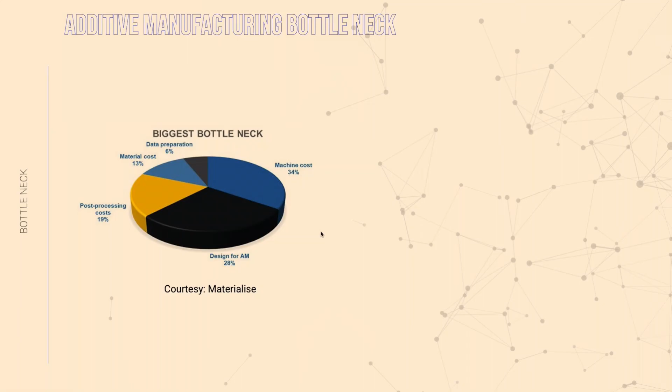So first, I want to start with the bottleneck of additive manufacturing industries. So these are some charts that I found online from Materialise, saying what is the main concern with additive manufacturing. Maybe many of you have seen it on LinkedIn. And we can clearly see that design for additive manufacturing and data preparation are kind of as important as the machine cost.

There was some other website showing what are the 10 biggest challenges of additive manufacturing. And that's where we saw that, okay, of course there are concerns with the slow production rate from the machine side, material development, manual post-processing. But then there is also a lot of things about design. We need to get the design right, get design ready for the additive manufacturing processes.

We also need to educate the workforce, also engineers and technicians who are familiar with traditional manufacturing processes. We need to bring the education on the additive side. Same with developing a business case. And it looks pretty obvious from our perspective that additive is always a good case. But it's not. We can't do everything. It's not that cheap either. So we need to find the right business cases. And there are many other things.

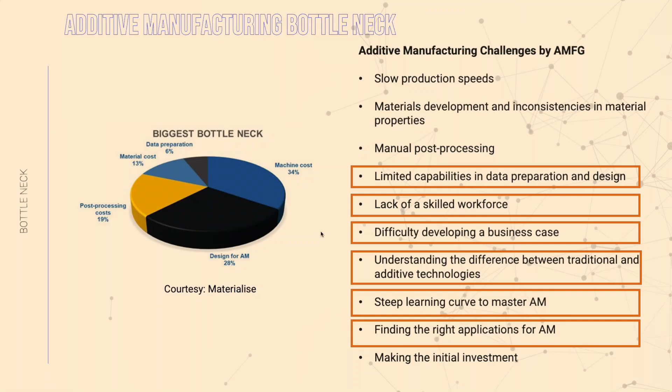So we at CDS are focusing on 6 of those things. It's a big task. But we want to make sure that all these challenges are reflected well in our software suite, and that's what we are bringing to the market. The biggest industrial challenges I can summarize in 3 questions that companies may be asking themselves. How can additive manufacturing benefit my business? Identifying the opportunities. And what do we mean by opportunities? Cost saving, lead time saving, carbon footprint reduction, weight optimization, etc.

Then, once you already have a large innovation department on additive manufacturing in large organizations, the question is also how can I store the know-how from the experts and redistribute it to the other people around the organization. That's also a challenge that we believe is true, and we have seen it in the automotive and aerospace industries that we work with.

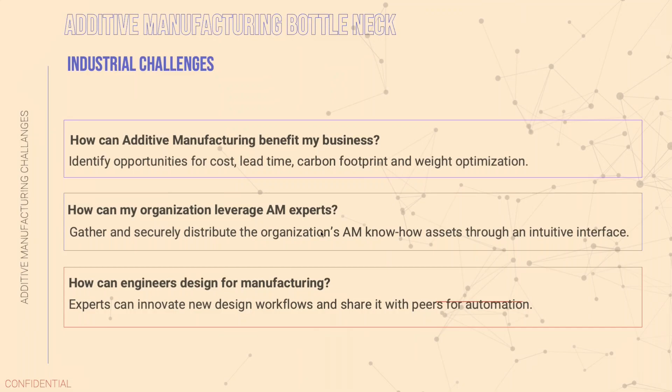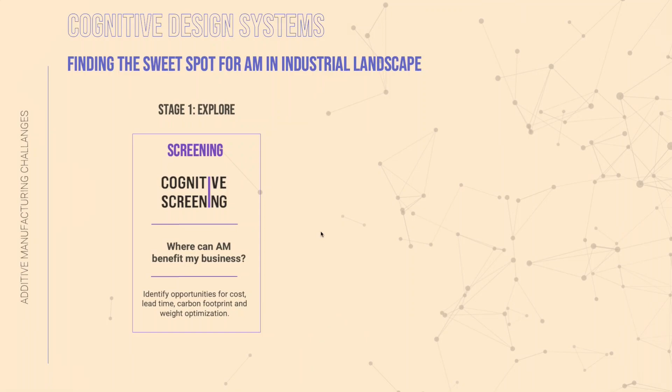And the third one is how to think AM from the beginning while conceiving a product. That's where we need innovative workflows where we can actually convert those opportunities into something more tangible and make something happen out of it. So in order to do that, we started by creating a software which answers the question, where can AM benefit my business? By identifying the opportunity for cost, lead time, carbon footprint.

Once we have identified those opportunities, not all the parts that we see in the industry are already ready to be manufactured in additive. They sometimes have to be adapted for this purpose. And I'm sure there will be some other talks later on about it. The second one is, once I have that know-how on additive, how can I propagate it? For that, we created a software called Cognitive Additive, where you can store your know-how and redistribute it to others who are maybe not as familiar as you with additive manufacturing. So that's also a key point for us.

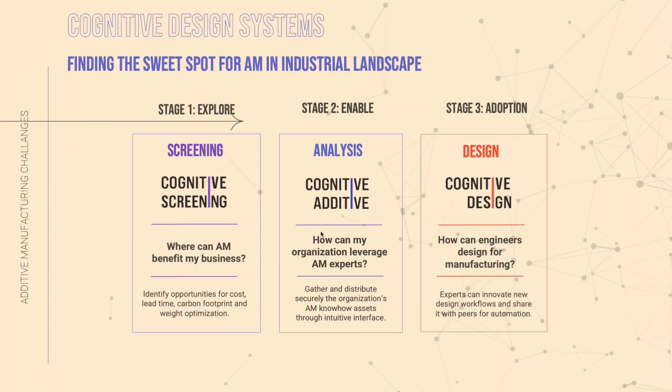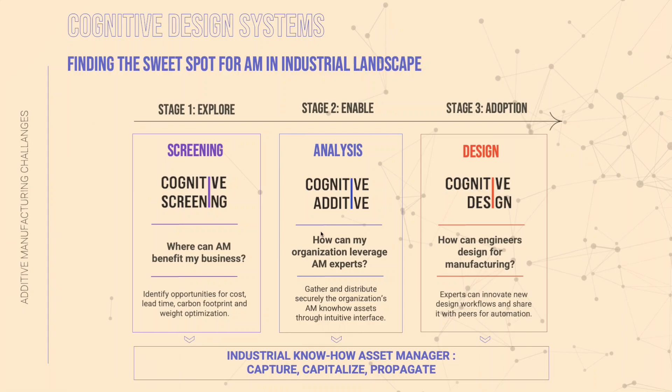And the last one, which we are presenting for the first time today, is Cognitive Design. It's our computational design software, where we can rethink how we are conceiving, but also adapt the interface to the expert level of the person in front of the software. In order to do that, we are creating an industrial know-how asset manager where we are able to collect all those insights and redistribute them through these different softwares, so we can design better, produce better, make something out of additive and find the right business cases.

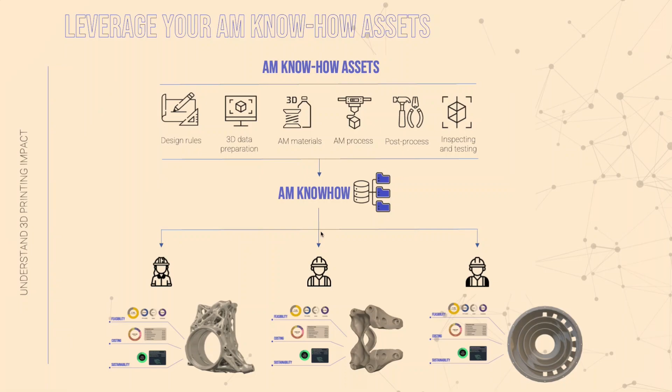So it's pretty simple. We collect those data into this database, and then we redistribute it to the various designers, AM operators, technicians, so they can understand how feasible is my part, what is the cost related to my part, what is the carbon footprint related to the manufacturing process itself.

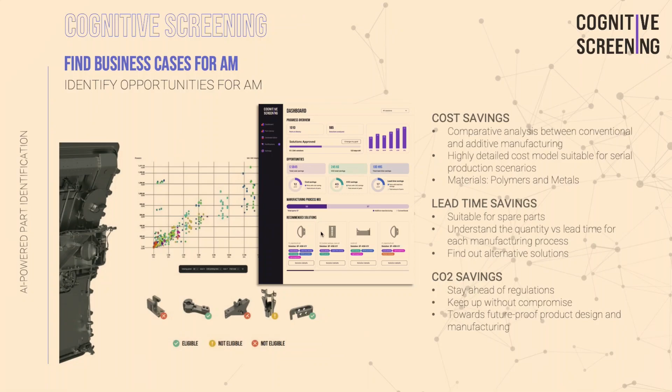That's our first step. On the screening side, as I mentioned, cost saving, lead time saving, and CO2 savings are key. We are able to take into account large assemblies or the BOM of organizations to find those opportunities. Same way with Cognitive Additive, you can very quickly, based on your database and your experts' know-how, do the feasibility check, costing check, sustainability check.

The costing model is based on, how can I say, the industry standards, and that's where we leveraged it. It's not just printing. We have pre-processing and post-processing that we need to understand, because sometimes those costs can go up to 40 to 50%.

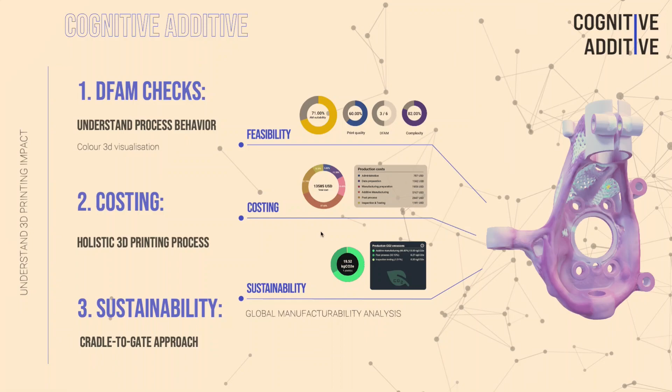Same with the sustainability. There is a lot of new trend now, and of course in Europe it's more and more important. There will be some standards coming out on the European Union side, so we need to be prepared for it. And the last is cognitive design, how to design better.

So our approach: we are coming from the manufacturing industry. My background and my colleagues' backgrounds are also from manufacturing. We were producing parts, we were failing them, and we understood where the issues are while designing the component. So we wanted to make sure that all the components coming out of my software are manufacturable. Because if it's not manufacturable, it's an art, and that's great, but it's not always our purpose. Also in large industrial organizations, that's not always the purpose.

So we created this software where we automate DFM. We will show you. We were able to create workflows using our geometry engine to automate the various time-consuming processes and steps of modifying a geometry into a manufacturable geometry. Second is how to leverage the opportunities that AM is providing us: lightweighting, part consolidation, mass customization, and adding functionalities to the part.

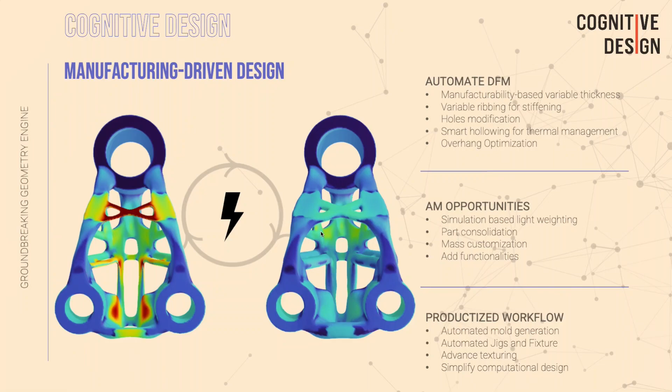And at the end, we want to make sure that these large workflows, sometimes created by experts, the expert engineers or doctors, reach the masses. As my friends at Trinckle mentioned, even the doctor in the dental studio should be able to design for their need, and that's what we are bringing. So, manufacturing-driven design. We are trying to bridge design and manufacturing by doing this.

And for that purpose, we have two categories of workflows. First is the product design cycle acceleration workflows, and the second is the productized workflow for non-specialists. The idea of product design cycle acceleration is how to make sure that all designs are manufacturable, how we can automate the tedious and repetitive tasks to accelerate them, and take informed decisions while conceiving the product.

The second one is how to adapt our UI to make sure that anybody, from somebody on the shop floor to somebody in medical design bureaus, should be able to design without having knowledge of computational design. So how can we package it this way?

So let's start with the design cycle acceleration. This is a workflow produced from all the experience we got in the automotive and aerospace industry. Of course, I have linearized it, but it's not as linear as it looks. We do the ideation in the CAD software. Sometimes we do shape or topology optimization. We do the reconstruction of topology in CAD. We do the design for manufacturing and FEA validation.

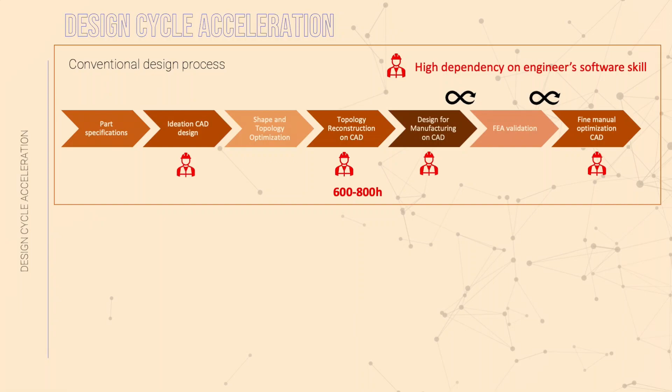Most of the time is going into design for manufacturing. That's the biggest, because it's not the same department. The information is sent to another department and brought back. There is going back and forth, and that takes a lot of time. So we wanted to bring those insights into the CAD environment. In order to do that, we created our workflow where we automate some of those time-consuming processes.

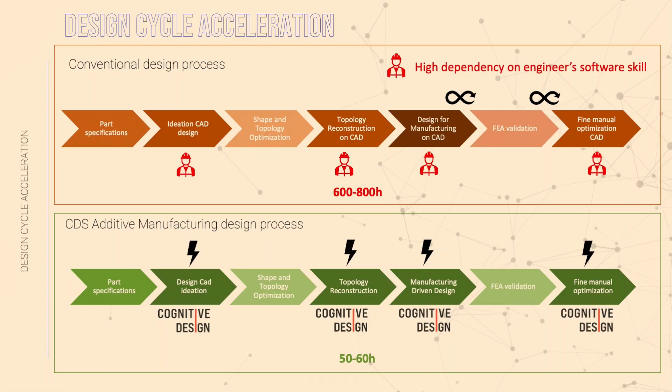So with cognitive design, we are able to easily create the ideation, the rough CAD. Once the topology optimization is done, we can also do the reconstruction automatically. I will show you that. Manufacturing-driven, same way: convert the part into a manufacturable part. And at the end, the fine manual optimization can also be done. We demonstrated with our customers that we were able to reduce the time by 90%.

These are the hard facts from the aerospace industry with Safran and others; on the Japan side, it was Mitsubishi Electric. On the automotive side, Nissan and Yamaha. Why are there so many Japanese names here? Because I used to work there for 8 years, so we continue working with them. But we also believe these workflows can apply to consumer goods, and that's what we demonstrated with Adidas and Oberalp.

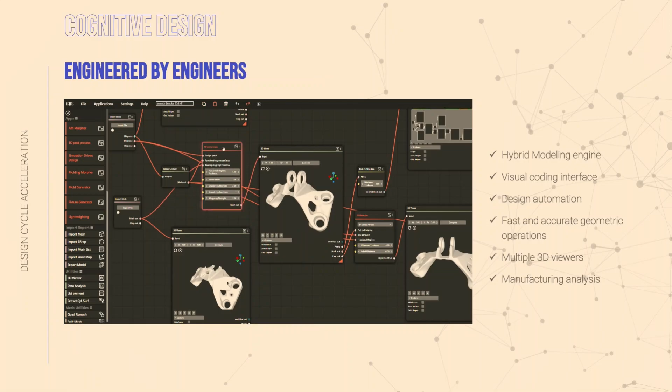Cognitive design is a software engineered by engineers for their needs. It's a hybrid modeling engine with a visual coding interface. As you can see, there are multiple viewports you can look into, so it's easy to compare with that.

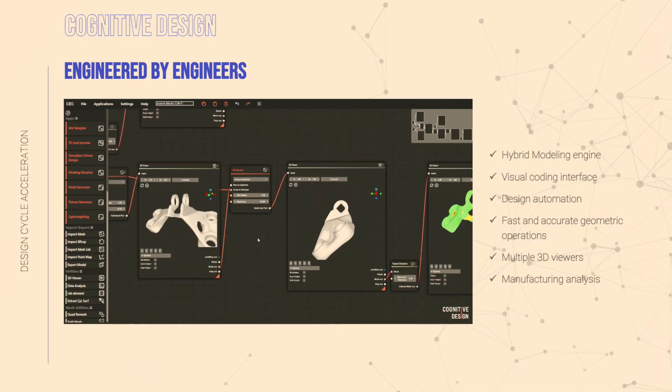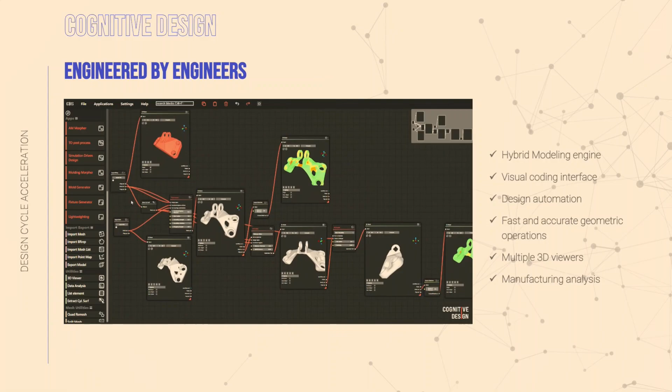Its focus is on the automation of design. We create macro blocks or workflows which focus on automating the tedious tasks of design, filleting, and Boolean operations. At the end, we also have a manufacturing analysis view where we can see, while conceiving the part, is it manufacturable? Where the wall is too thin, where there can be any issue with support structures. So we can iterate much easier in the same environment and faster.

We focused on six different workflows. These are the primary workflows, and we will continue developing new workflows afterwards. The first workflow is design for additive manufacturing. How can we automate that?

Second is simulation-driven lightweighting, or design in general. How can we modify the geometry to make it lightweight but still manufacturable? Then topology optimization reconstruction.

That is a personal choice. I was spending too much time doing that while doing topology optimization on various CAD tools that I can't name, but yeah, I wanted to automate it so we can actually spend more time on creating different variations.

Then design for molding. How can we adapt any kind of mold design, any kind of geometry, into a moldable design? So we start with a two-part mold, a simple one. We will go into detail further on how we can do much more complex molds.

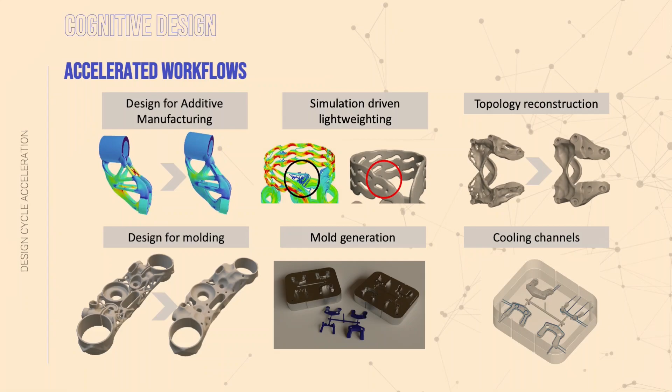We also do the mold generation itself, because once the workflow is set up, we can just input a part and bring out the molds, and we can print with cooling channels, where you can select, based on your stress and thermal stress, where the cooling channel should pass through, and it creates automatically. So the AM morpher's idea is to not spend time on CAD while changing the geometry.

Moreover, we are trying to reach complex geometries. Those complex geometries are not always easy to modify in CAD, because we need to find those structures everywhere. This is a very simple example, but imagine a heat exchanger with a lot of thin structures, and how can we modify those structures automatically so we can make it manufacturable easily.

Also add some ribs if the wall is too thin, to bring some stiffness to it. For hole modifications, first we do feature detection on the mesh of the holes, and once detected, convert them into diamond or teardrop shape, so we can print it easily and also add some over-thickness easily.

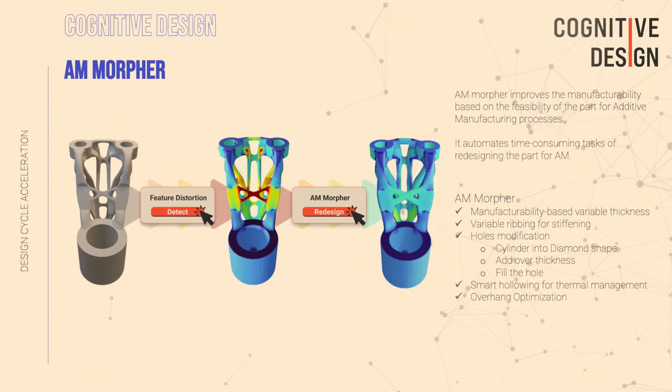Same with smart hollowing to do thermal management. If you have data from the thermal stress, how can we create the void but also create self-supporting structures internally, so we are able to print it easily without having internal supports? That part is done with just one block here. You convert it into that design pretty easily.

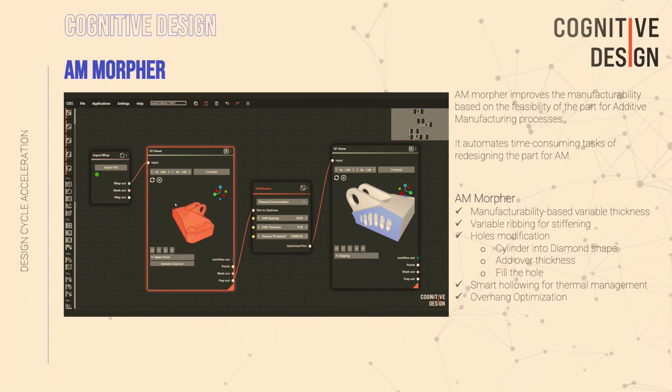Something we are working on, which will be ready for Formnext, is overhang optimization. We also modify the overhangs mathematically, so we don't have to work on it manually creating it, because the geometry coming out of topology optimization is not always easy to work on, so that's what we automate.

The second one is simulation-driven lightweighting. This example is used a lot in the aerospace industry. They wanted to keep the part almost the same, but wanted to reduce some weight. So based on stress, we changed the thickness of the geometry and reduced the weight like that, and we were able to obtain up to between 15 to 20%.

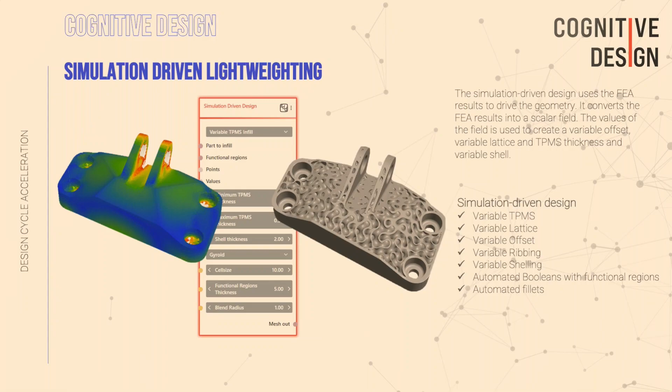It's not as large as topology optimization, but it's something which is a low-hanging fruit, I would say, that needs to be captured. Then the topology optimization post-process, it's pretty much all the Boolean operations, all the operations to reconnect the zones which are disconnected, that needs to be automated too.

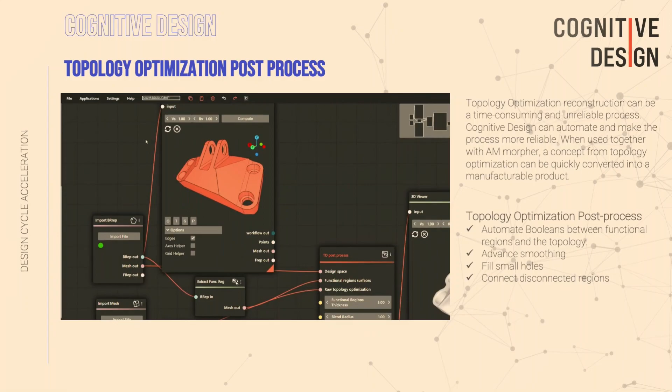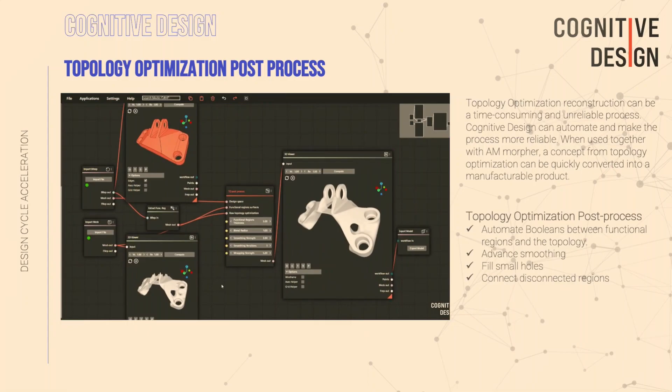So what we did is bring in the design space, extract the functional regions automatically, and put in the raw topology optimization part which comes out of other software. There is just one block which calls the topology optimization post-process, and in a few seconds you have your part ready, which can go into the manufacturing analysis process afterwards.

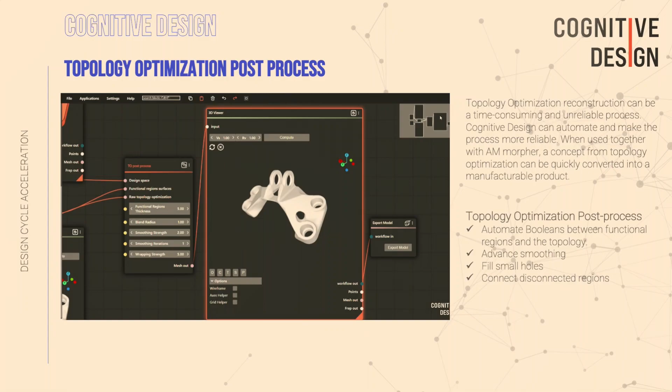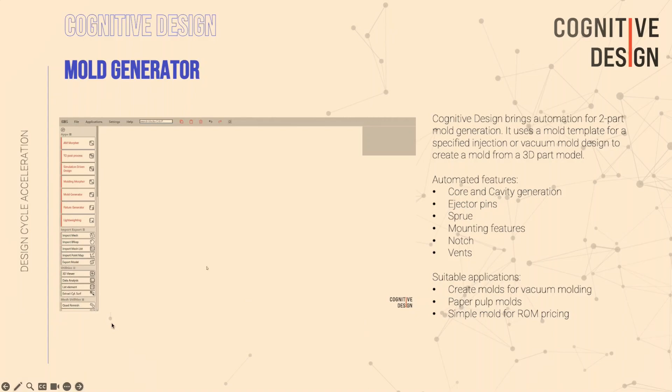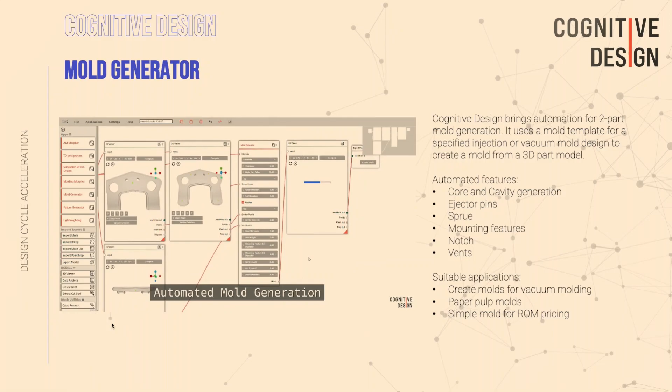So the mold generator, we work with mold manufacturers and injection molding companies to design molds that fit their machines. We bring in the part, select zones for ventilation, ejector pins, and injection points, and based on that we create a mold. You can see it's accelerated, maybe 2 times, but not much more.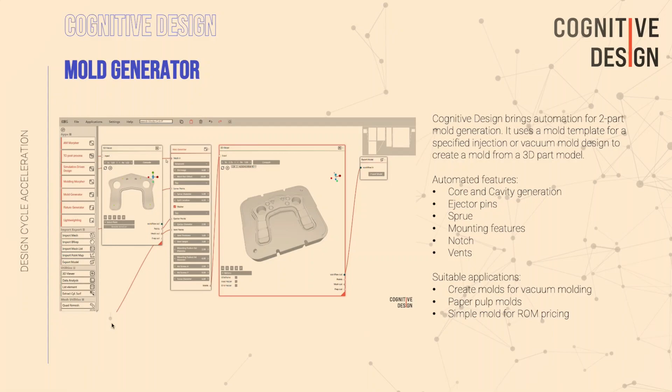You have this two-part mold ready to bring out. All this is great, but currently all the mesh we bring out are mesh models. We are working on R&D, which I'll talk about later, on how to convert it into a STEP model with feature detection, a bit different from what's currently in the market.

The second workflow type is productized workflows, where we supercharge operators with computational design so they don't have to be specialists to leverage it. We automate the creation of simplified UI directly from our computational design engine, with input, output, and a 3D model in between, so you can create workflows and share them with colleagues to easily use.

Something which is not automated is the add-ons and plugins that we work on with our partners, such as Synera, GrabCAD from Stratasys, but also Autodesk.

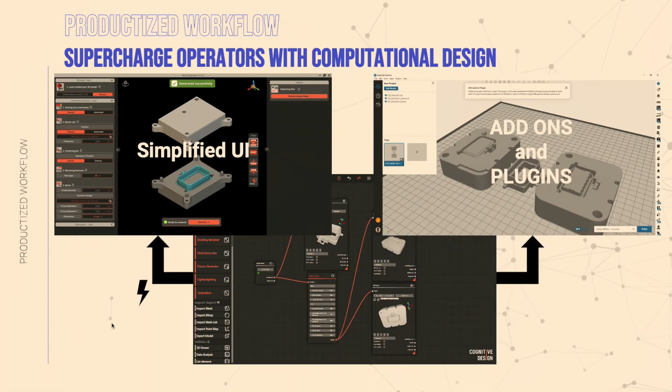Some specific workflows we automated are paper pulp mold, CMM fixtures, texturing from an image, dental aligners, and surgical guides for dental. All this doesn't need the computational design thing—you just import your 3D model, export a 3D model, with a few parameters you can tweak, so you can easily generate your models. We let the experts do the computational design so they can create complex workflows and provide the right inputs and outputs, so there's flexibility there.

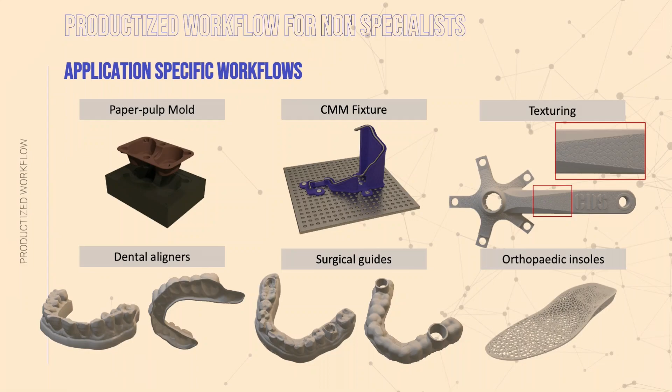We also work on orthopedic insoles with the same purpose. We brought these workflows and add-ons, as I mentioned, onto GrabCAD, Synera, and Fusion 360.

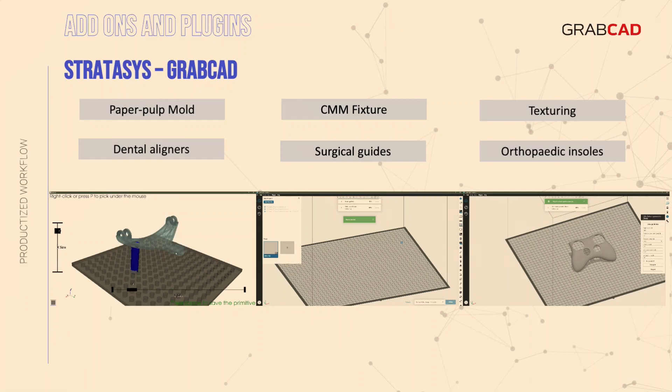On Stratasys, the focus was that the machines are used on a shop floor, not in a design bureau. These machines for mass production are operated by technicians and operators—they should be able to design themselves for their needs: jigs, fixtures, but also dental aligners and surgical guides. They are not CAD operators there, so that's what we're doing with GrabCAD—we automate this pretty easily inside the GrabCAD environment so they don't have to leave it.

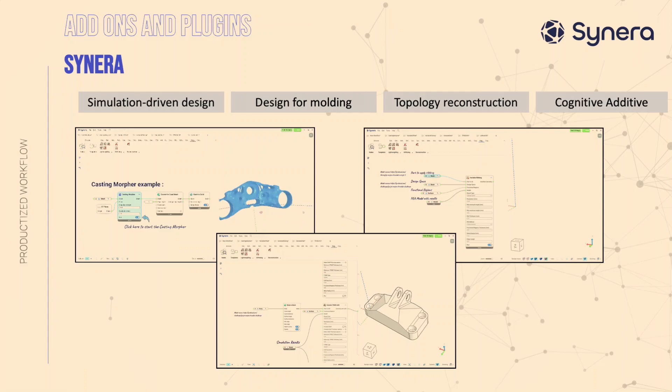With Synera, it's similar kinds of workflows but more complex designs—simulation-driven design workflows, design for molding, topology reconstruction workflows, and cognitive additive workflows are already present in Synera. You can leverage it with other Synera tools or Synera's partners' tools to create something much more valuable, much larger engineering workflows.

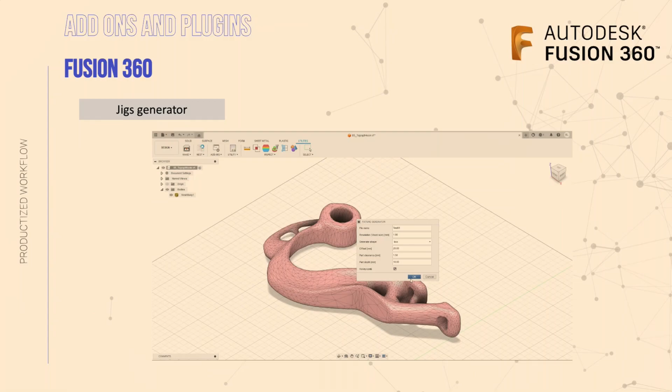In Fusion 360, it's pretty simple. We started with the jigs generator—you put in your part, you have a few parameters you can tweak like the size of your jig, it's a CMM jig, then you click OK and it's real time, so you have the part ready. This is very simple but can be used by operators very easily.

The last point is what we're doing in research and development. All these workflows export mesh, and we all know how much industry loves mesh, STL, right? So what we're trying to do—of course there's an alternative, 3MF, I have to mention—but we also want to bring it into a BREP format.

We did some really great research on this together with an engineering school in France. We were able to convert 2D drawings into BREP models automatically, using various machine learning algorithms. The results are very promising, and by the end of the year or beginning of next year we should be able to bring it to market.

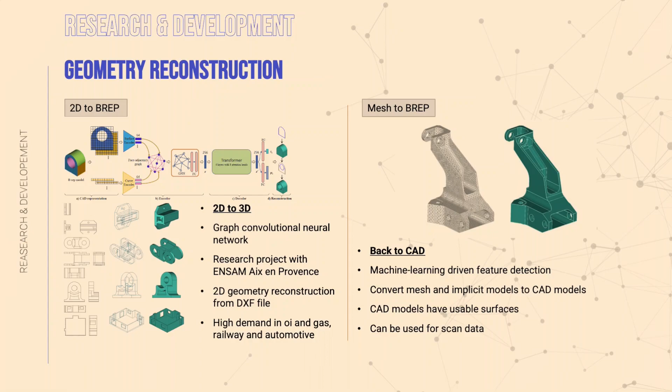So that's us—we connect design engineering with the factory floor, basically in both ways, by bringing insights of manufacturing to designers and bringing design tools to the factory floor.